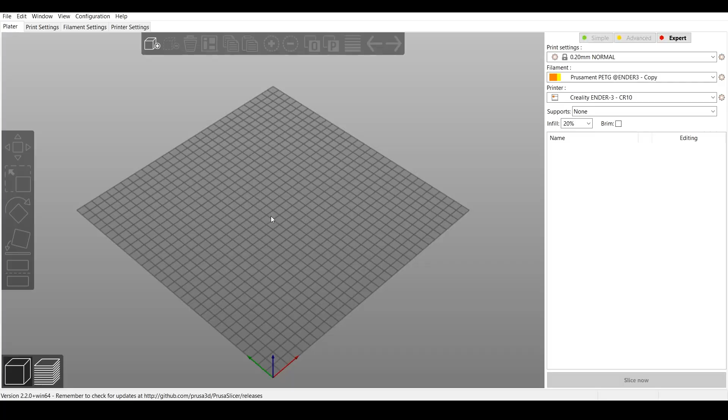So let's export this thing and slice it on up. I'm going to scroll down to export. Here I have a little STLs folder, and let's do export. Now we're inside Prusa Slicer. Let's go ahead and add our object, and we'll just grab our hammer. And there it is. I'm actually going to shrink it down just a little bit.

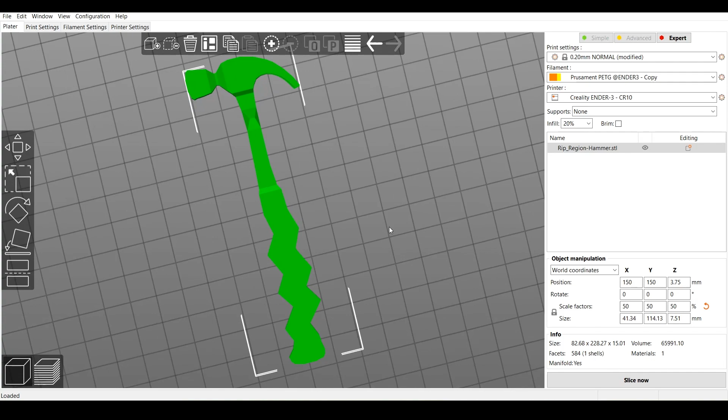I'm going to scale it 50%, just to make it a little smaller, because it's not actually a functional hammer, it's just for fun. Let's go ahead and check our settings. 0.2 is fine, infill 20% on gyroid, and we should not need any support material, but I may add a few little raft layers. Actually, let's not add any rafts, I just want this to print straight off the print bed. So it is manifold, yes.

And slice it on up. There we go. Within 45 minutes, I'm going to have a little hammer that I can bang on stuff with.

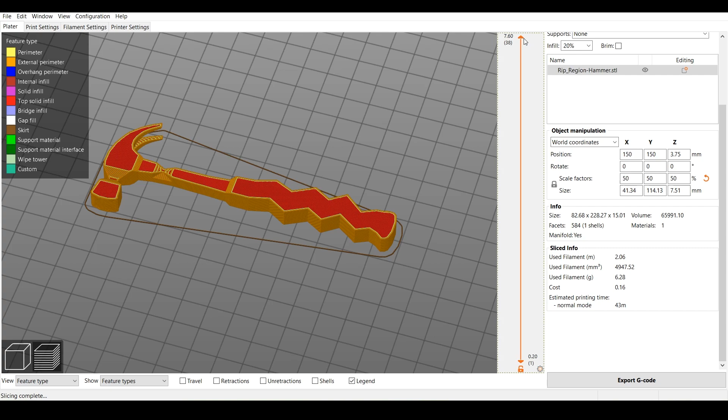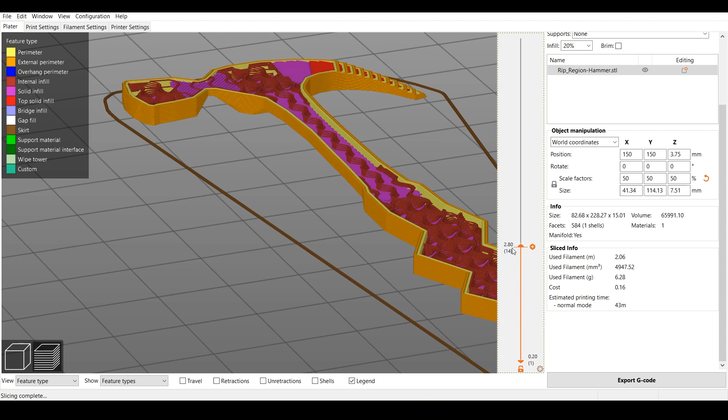So notice here, if we scrub through, let's just scrub through this. We've got our base layers, and then when it gets to here, it's going to bridge, which will be an amazing feat. And then we've got a little bridge that will happen here, or actually it's just a very tiny bridge. And we'll bridge there, and then we've got our little mark from the Rip Region tool.

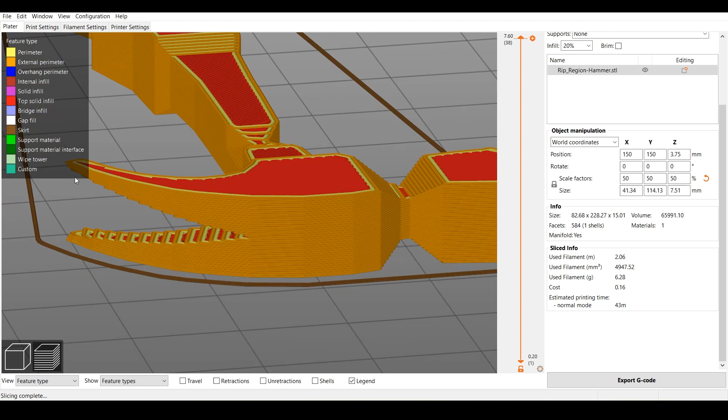And this part right here, this little nail grabber tail here from the right here, this right here, that's why I kind of took it to a pretty extreme angle. This wouldn't be a normal angle for a hammer, but I just wanted it to 3D print without supports. So I took it to that extreme, and it's just really for looks. But if I was making a real hammer, it would have been a little tighter. But I am very happy with that, I think it's super funky and fun looking. So let's go ahead and print that thing.